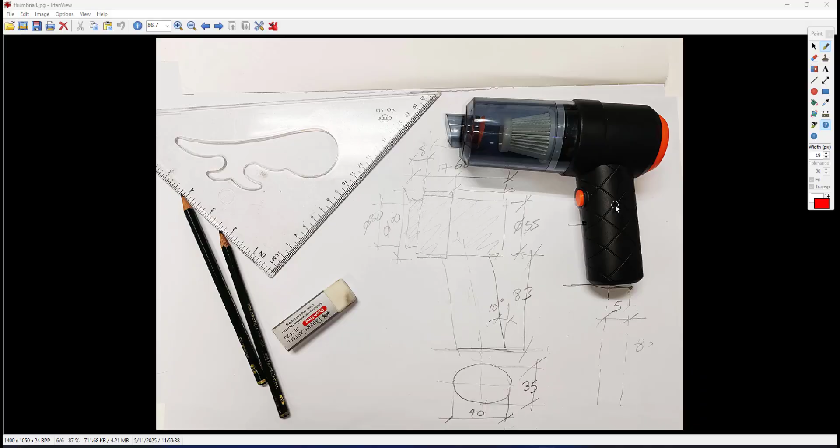This video will be part 1 of my SolidWorks project. For this semester, I asked my students to do this product, which is a mini USB charge vacuum cleaner. So this is mine. I already bought it from Shopee. So my students are here. I can share you here in Padlet. I have 30 students, so this is their choice. So we have various kinds of design here.

So for example, this one is more like this kind of shape. This is more cylindrical. This one has a handle that is more like an organic shape, and the rest is kind of like a gun shape, cylindrical shape. We have various kinds of design. So I did ask ChatGPT, if my students have various kinds of design, what version of mini vacuum cleaner should I do for my video tutorials. So ChatGPT asked me to do this one, the gun shape.

I hope, inshallah, I will try to complete before the end of the semester. So a complete set of how I do part modeling up until assembly, and maybe up until a set of working drawings of this gun shape mini vacuum cleaner.

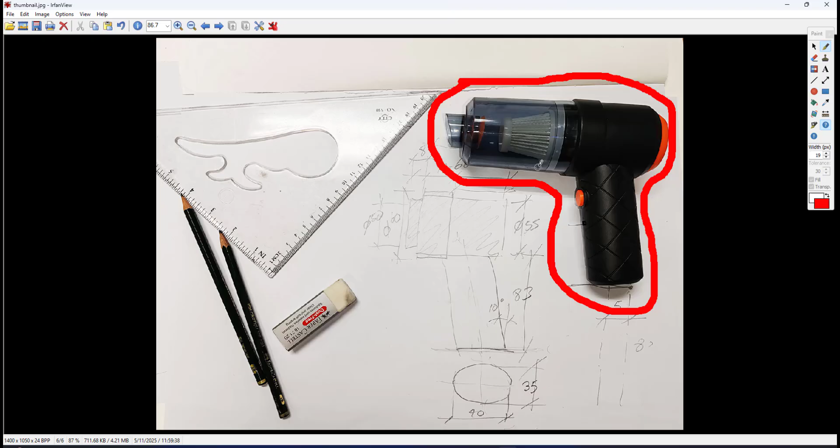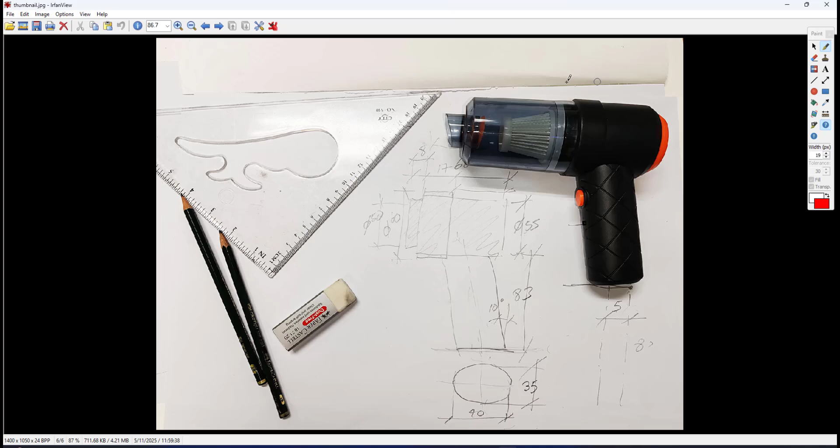For example, like the portable mist spray fan, I made a master model of the whole thing, then I would do splitting to front casing and rear casing, also splitting at the bottom for the water container, and then it becomes separate parts. But for this product, I don't think I will do the similar approach. I can make this as a separate part model. For example, the black color, we have a handle unit together with this chamber here. So I will do a part model of this black casing here.

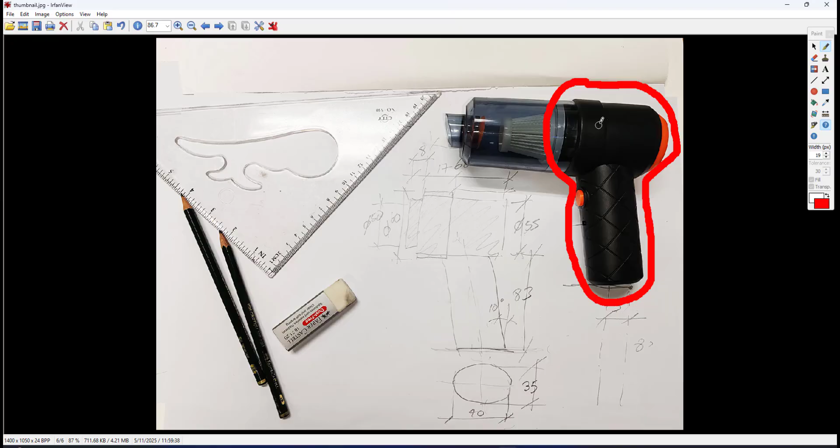Later in part 2, I will show you how I will do modeling of the other parts, like for example this vacuum chamber here, a cylindrical shape, where inside we have other components, an air filter, a valve, and so on. Alright, so for this kind of product, I will not do master modeling of the main body for the whole thing. I will do only this part, this black body here, the main body at the rear. If you look at this photo, I already dismantled the product, so the handle unit and this chamber here, and we have internal structure inside.

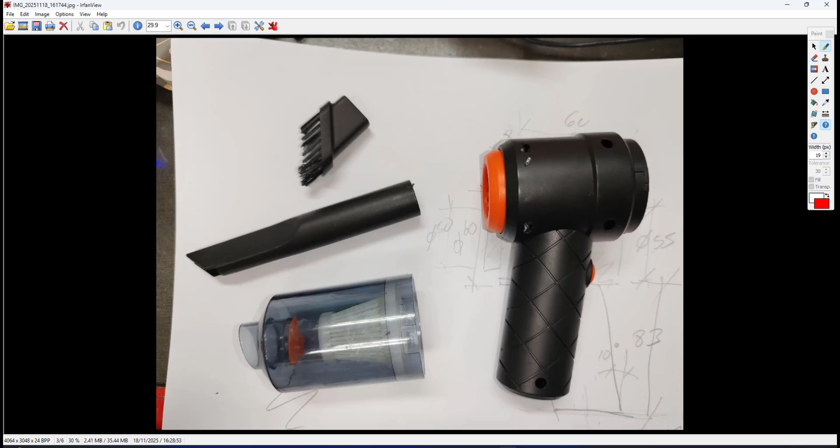When we do part modeling, forget about all the complicated structure inside. First we make the overall shape of the body of this handle unit, as shown here. So this is the handle unit. Actually this is turned to the other side. Let me flip. So it is like this. This one will be attached at this end here, and the nozzle will be attached to the other side. The long nozzle and the nozzle with a brush head are accessories. The main thing is the main body here, the handle unit. In this video I would like to show you how I will do this in SolidWorks.

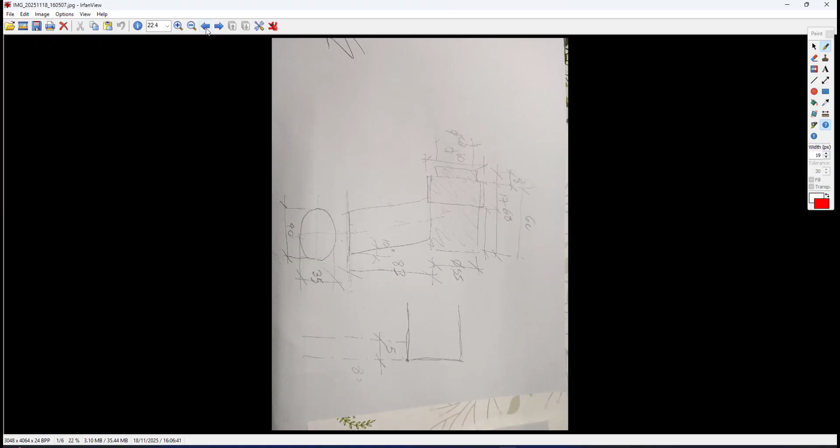An important thing in SolidWorks: when you do part modeling, you don't straight away do it in SolidWorks. You must begin on paper. So I've already done the sketch. If you look here, hold on. So this is the sketch. You must begin on paper, doing the sketching with rough dimensions. So this one is the dimension for the handle unit, the black color. So I already have the dimensions here. So make sure that you have this kind of sketch of the main body of your vacuum cleaner with rough dimensions, and then only can you start in SolidWorks.

Okay, let's get started in SolidWorks. So in SolidWorks, I will start part modeling and make sure that it's in millimeters. If you look in this photo, the orientation of this black color is a standing up position, so I will do it in the necessary plane in SolidWorks. Since it's a standing up position and it's basically a cylindrical shape, I will do it on the right plane. I will create a circle.

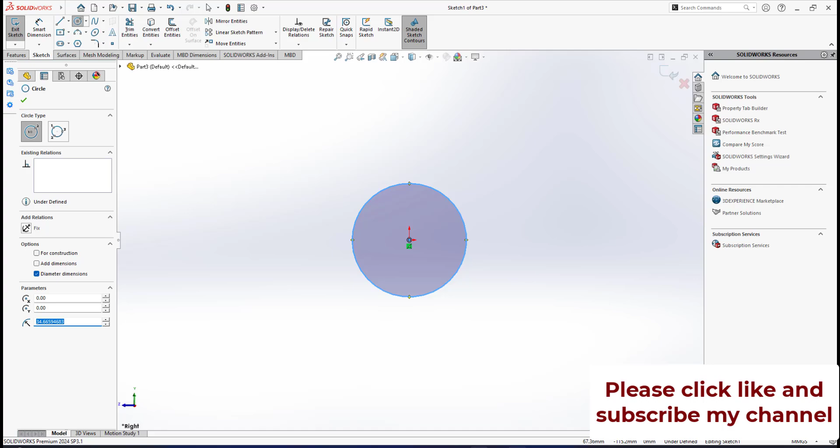So for the circle, if you look on the sketch that I've done here, I will start from the diameter 55 and the length is about 60. Then at the left end here, we have a smaller diameter of 50, and also here by distance 17, we have a bigger diameter 60. So I will start here. The base of the cylinder is 55, so the dimension is 55 units for the cylinder.

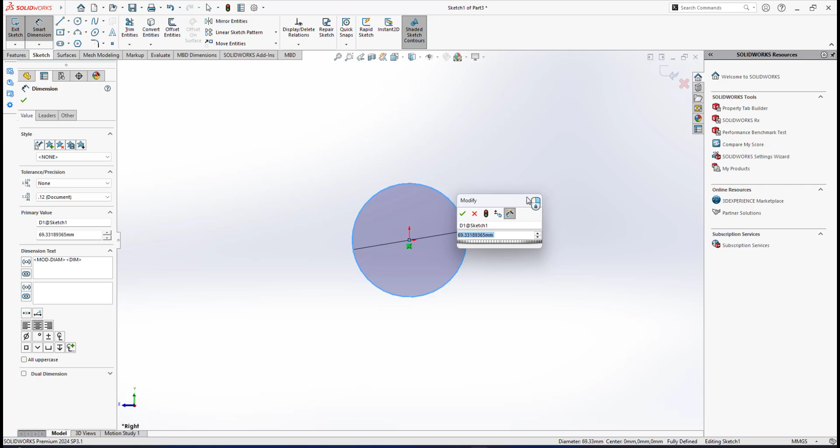So I will extrude it, but it goes to this direction. By default it is blind. I will go to this direction, and the distance is 60. So this is the main shape, the base cylinder here. Okay, I have the base cylinder 55 by 60, but I have a bigger diameter of 60 by a distance of 17 to the left, right?

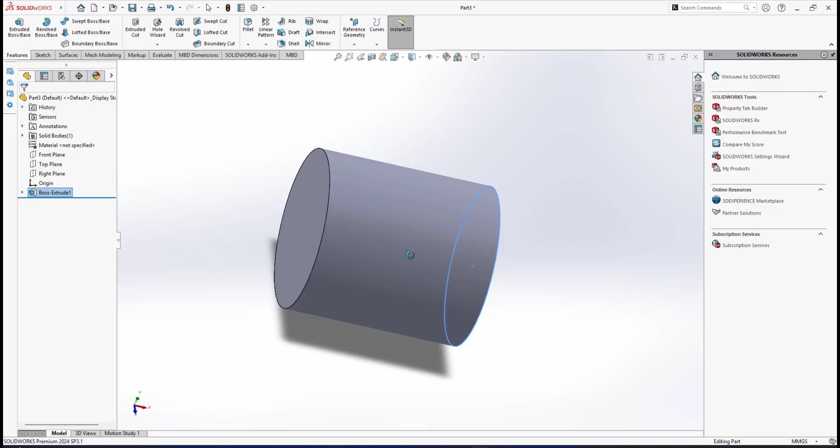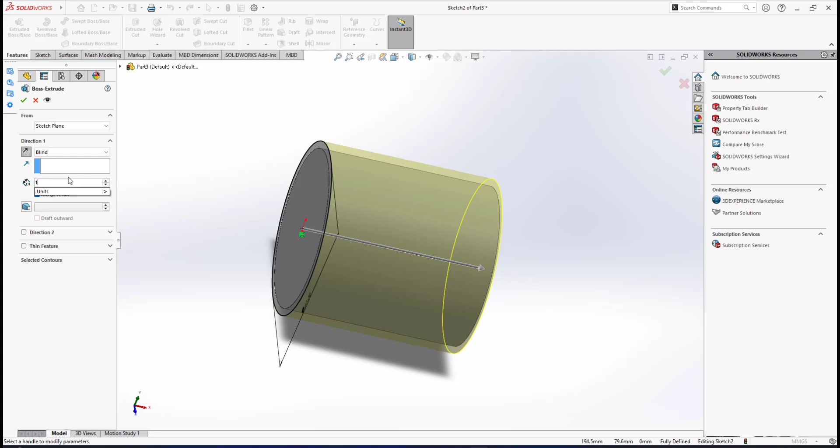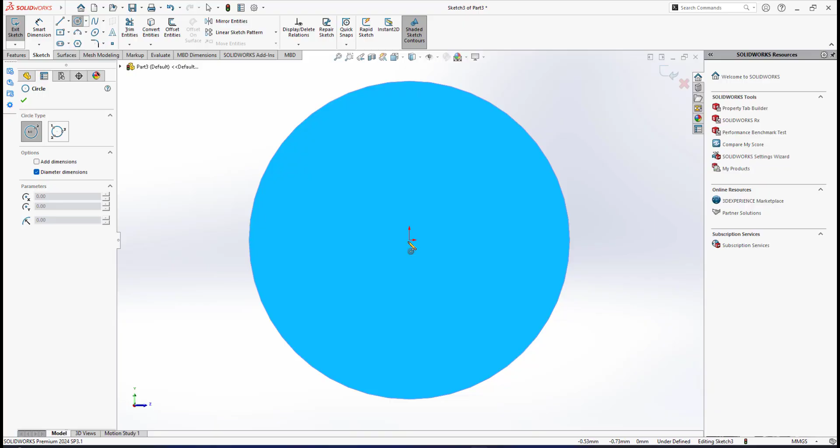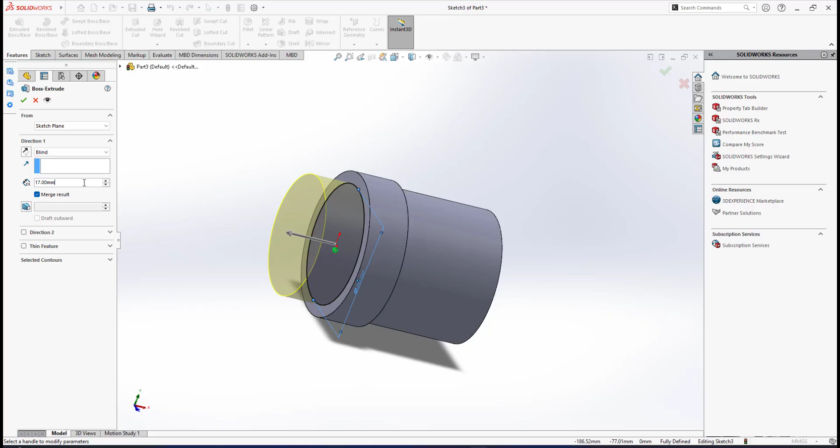So here at the left end, I will create a circle of diameter 60, and I will extrude to the right, this direction, by a distance of 17. So this will be the other feature of this main body. All right, at the end here, I have a small cylinder of 50, distance of 8. Circle at the center with diameter of 50. Hold on. The distance is 8. Okay, now I have the main body here.

Right, so this is the main body, and the next thing is that I need to create the handle. For the handle, we have an axis that is 10 degrees from vertical, and the distance from here is 83, and also here to here is 5 units from the end. It means we have a gap here of 5. So I need to create the center line by distance of 83.

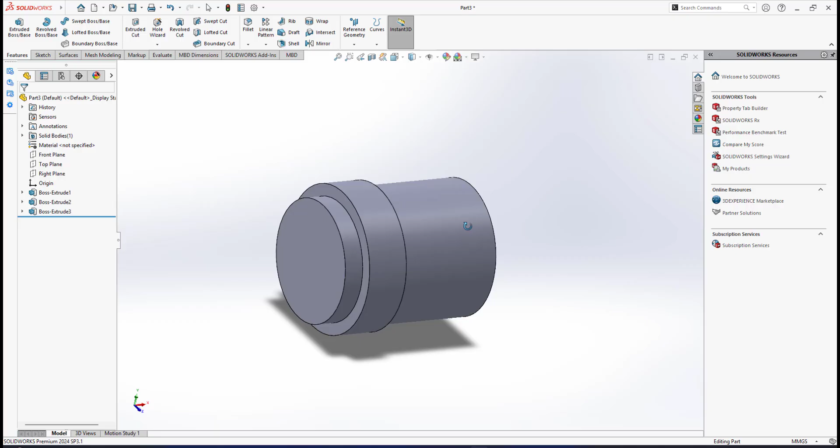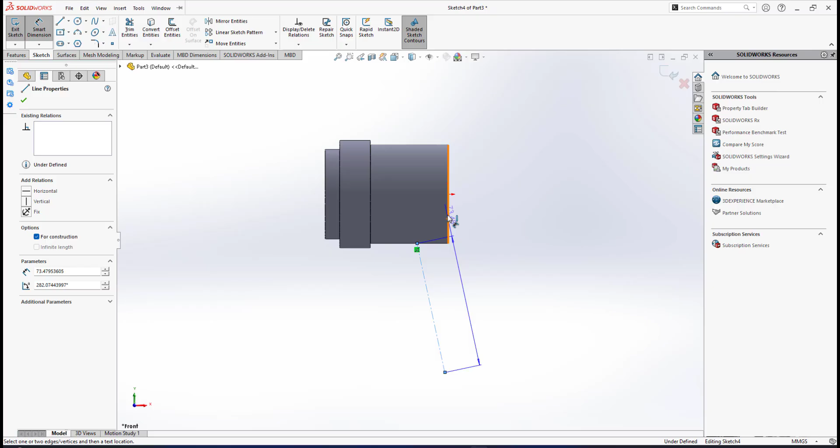So here in SolidWorks, I will go on the front plane, since the front plane is in the middle. I will create a center line, snap at this point, it goes like this, right? And if you look at the sketch, the dimension is 10 degrees to the vertical. So from here to the vertical edge is 10 degrees, 10 degrees from the vertical axis.

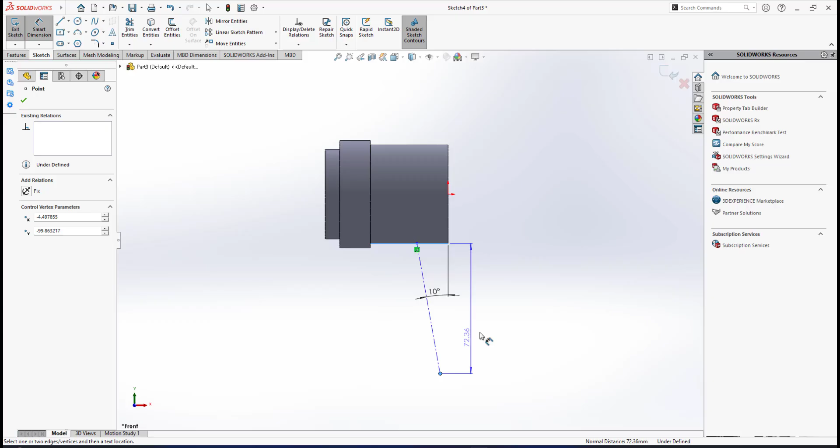But also in the sketch here, we have 83, from here to the bottom is 83. So it means the dimension from this edge to this point. Hold on, I go for dimension from here to here is 83. Alright, it's still blue color. I need to make the center line fully defined.

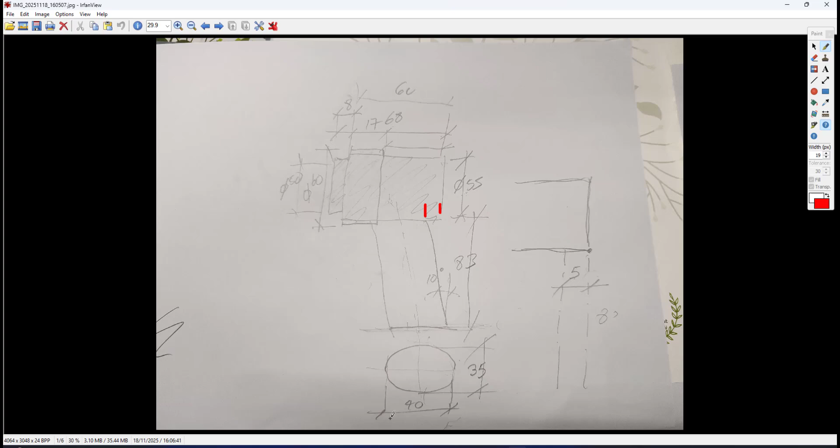Another thing to mention is that the cross section of the handle is not round, it's not a circle, it's an ellipse 40 by 35. Since the width of the ellipse is 40, half of it is 20, plus we have another 5 here, so from here to here is 25. So I will go for dimension from here to the edge is 25. Okay, now I have fully defined the center line. I exit the sketch.

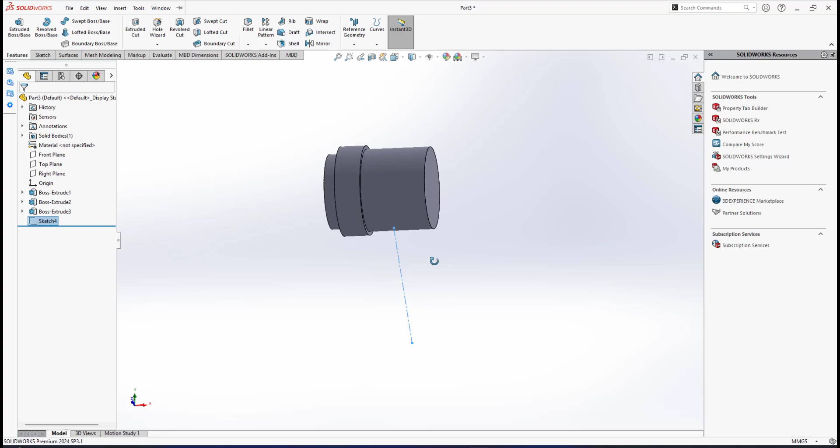Alright, since the cross section of the handle is an ellipse, here I will create a plane. First reference is here, second is there. On this plane, I will create a sketch. Okay, I can go like this.

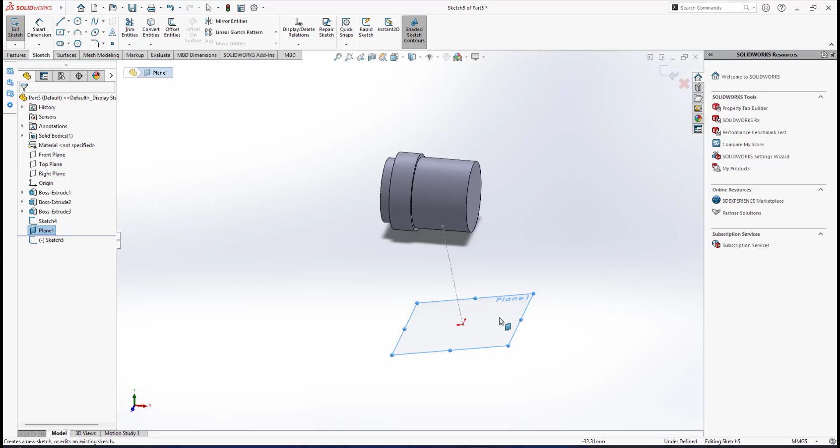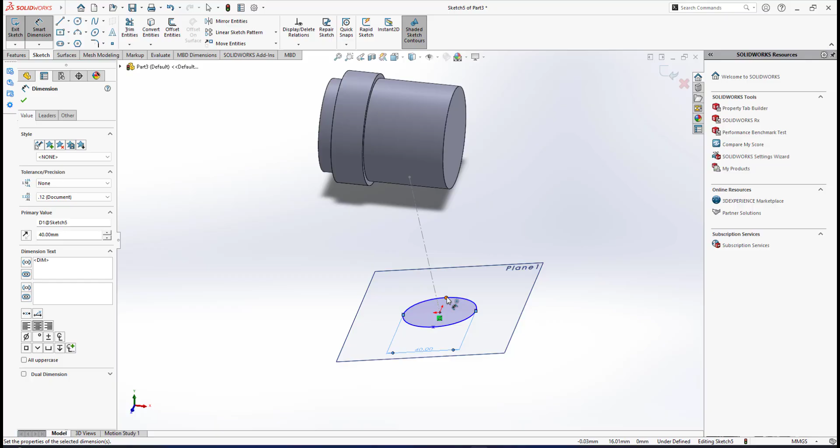Okay, here I will create an ellipse at this center point. It goes like this and like that, and the dimension here from this point to this point is 40, and the width is 35, right? The width from here to here is 35 units. As you can see, the shape is still blue color, it's underdefined.

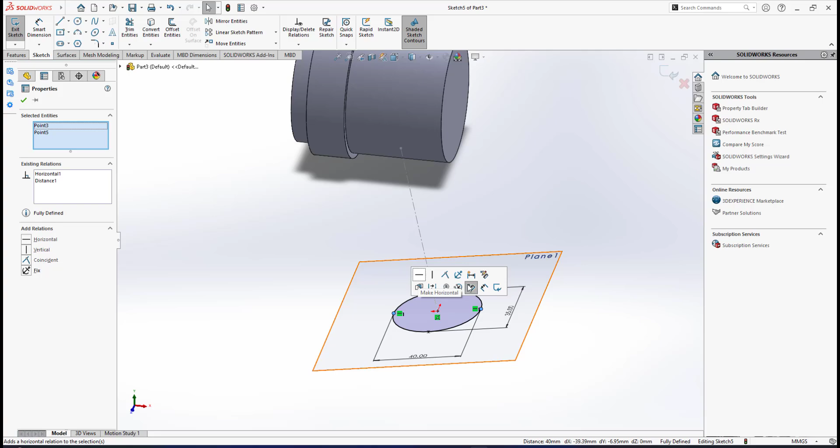I have to click at this point, hold my control key, click this point and make it horizontal. Now I have a fully defined sketch, and now I will do features, extrude. The direction is not downward, it goes upward, right? And I'm not using blind, I go to up to body, so it will end up at this body. Okay, then I go like that.

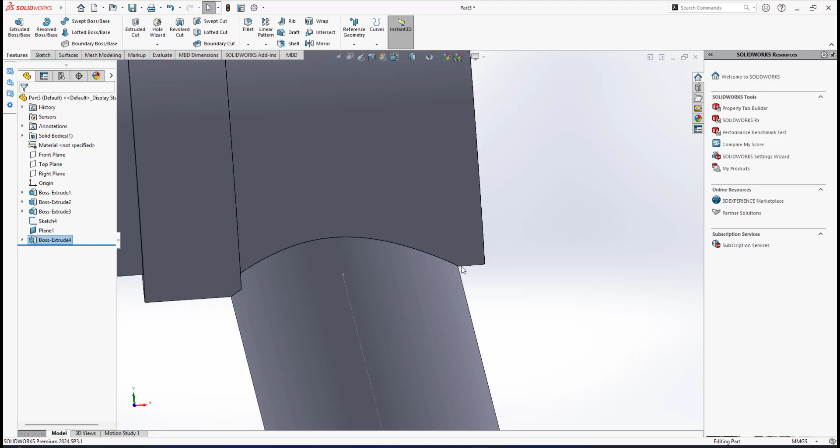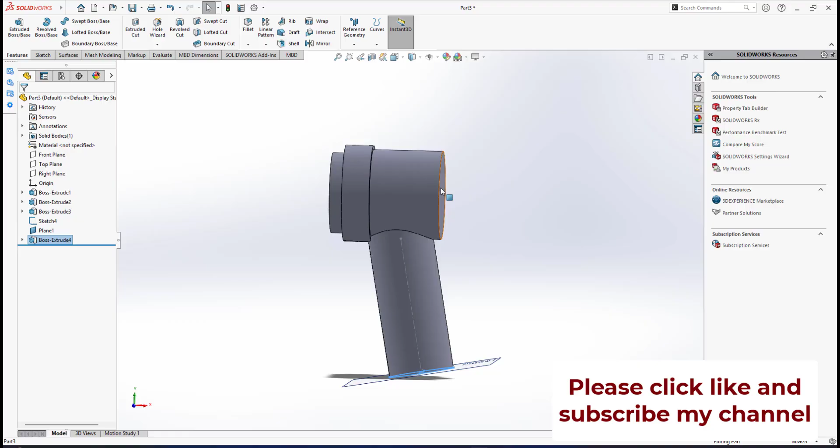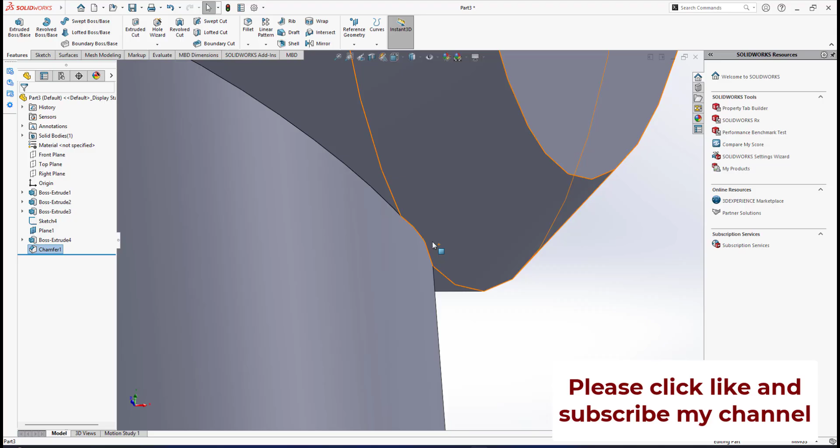Kind of similar. Okay, another thing is that if you look in the photo here, we have a chamfer. I already measured the chamfer distance is 5 units, right? So I will do here a chamfer of 5, and I select these edges, so I have a chamfer of 5 units, right? Okay, we have kind of excess here, so I can adjust a little bit. For this center line, it's not supposed to be 25. I put 26 to increase the distance.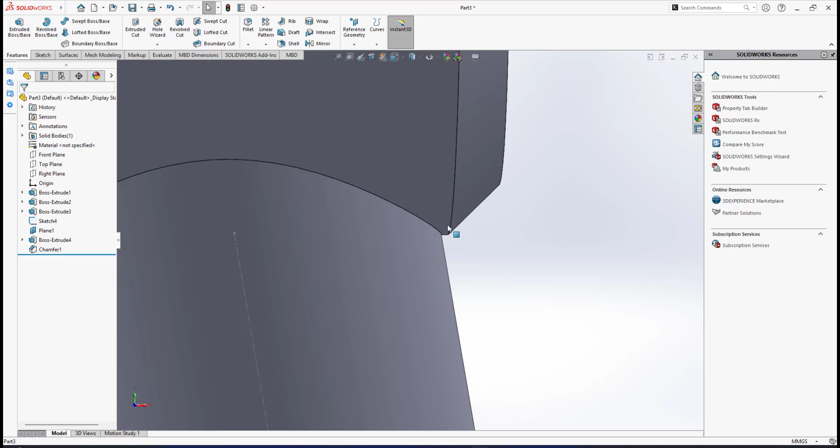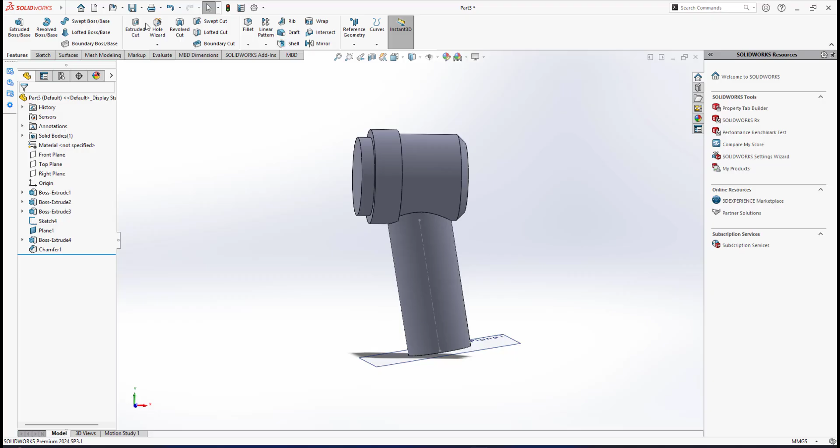Now I need to mix a little bit more. It goes like 5 millimeters from here. I adjust the distance of this one to be maybe about 28 units. Then, alright, I think this is good enough, so I will save this one as main body. I will replace the original file, so I have this main body of this vacuum cleaner as shown. This one is turned to the other side. The orientation that I show in SolidWorks is this orientation, right? It goes like this.

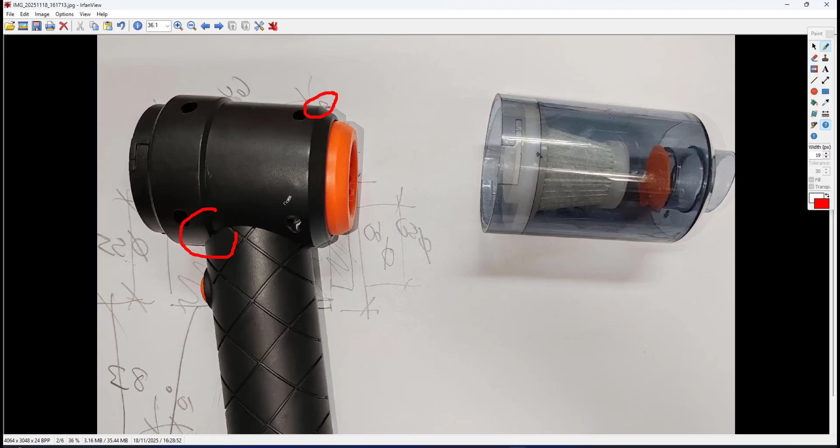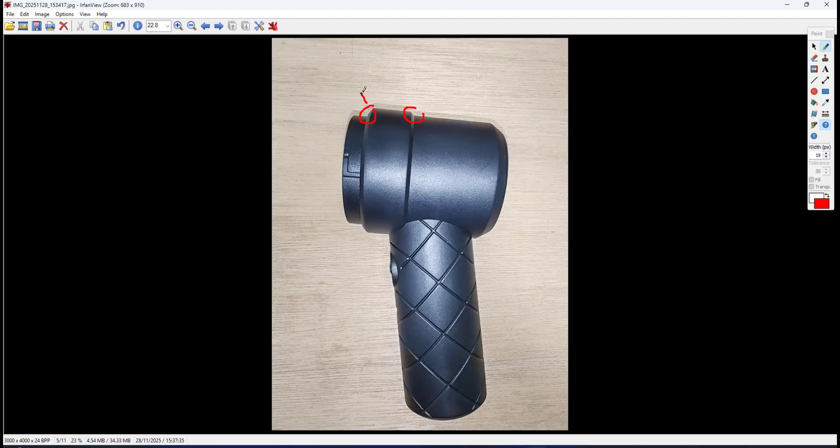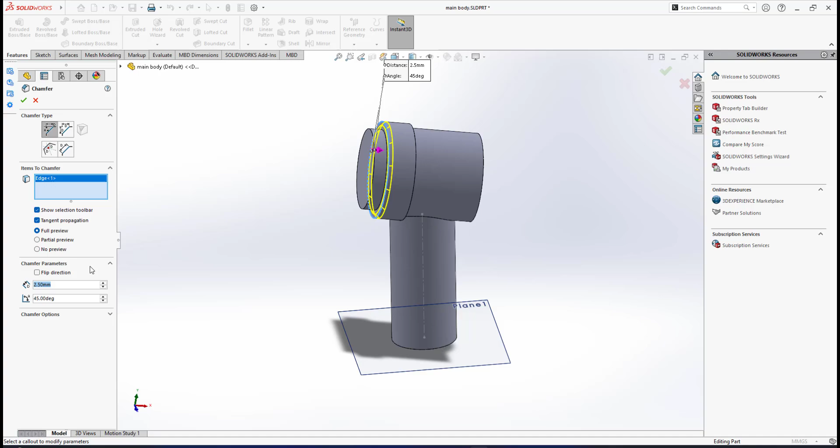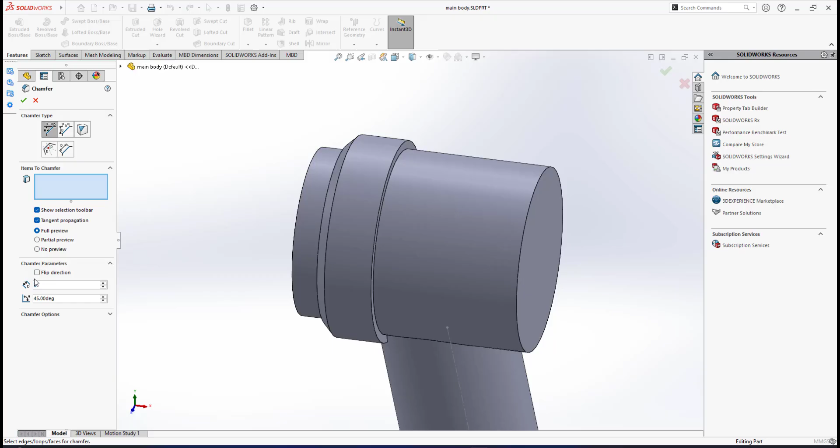Okay, the next move is that if you look at this photo, we have a chamfer here. For this chamfer, I will go for a value of 4 or maybe 3. This one will be 3, and at the edge here, since this one is 60 and at the back is 55, the chamfer is 2.5, right? So here in SolidWorks, I will go for chamfer. For this edge I put 3, and for this one, since the diameter is 55 and the bigger diameter is 60, we have a balance of 2.5 for the chamfer. So the value is 2.5, and I select this edge. Okay, I save my file again.

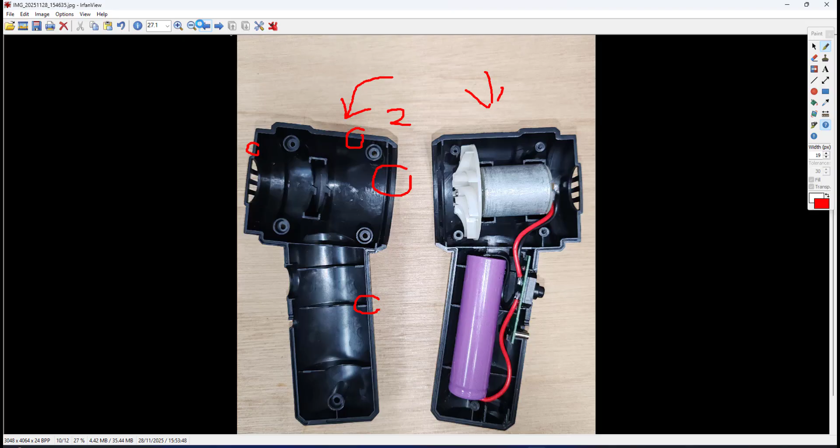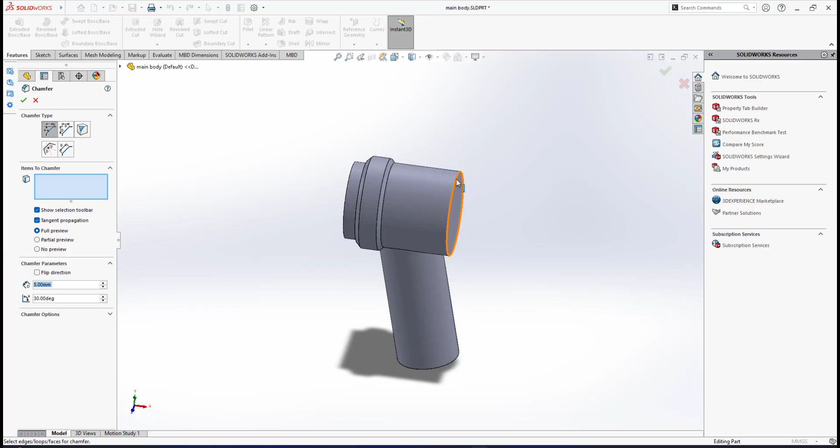Alright, the next thing is, if you look at this photo at the end here, if I zoom in, I discover that this chamfer is not 45. We also have a chamfer at the end here. It's not 45; the chamfer is more like 30 degrees, and the distance of the chamfer is 5. So at the end here I will do chamfer. I select this edge, the distance is 5 and the angle of the chamfer is 30 degrees. Right, so I have this chamfer at the back here.

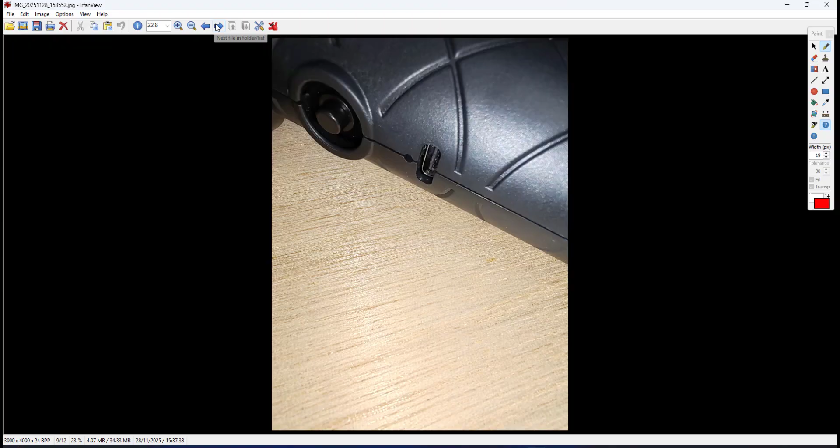Right, if you look at this photo again, I already dismantled this main body into this front casing, and this one is the rear casing. I already dismantled these two parts, and as you can see, the rear casing is at this orientation, and the front casing is at the other orientation. Right, so here, if you zoom in,

I need to split this main body into two parts to make the front and rear casings, and later I will show you. Here I will do shell. The thickness of the shell is 2 mm, but here the shell is even thinner. This is not 2 mm. Later I will show you how I will do this thin wall, but this one we don't have a wall.

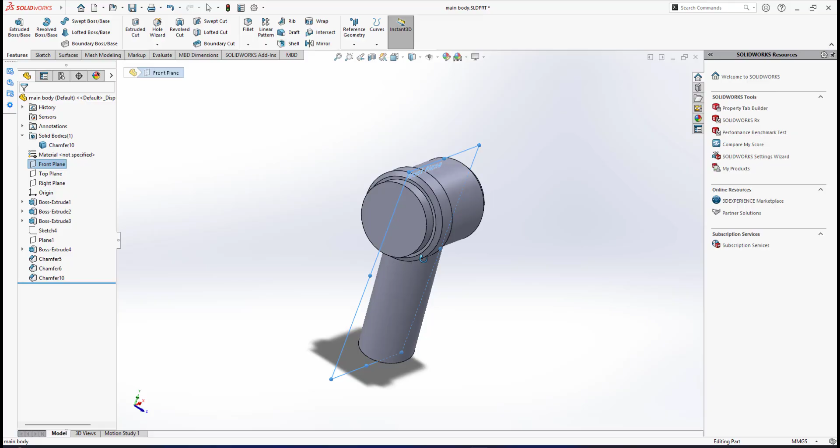It's a cut through holes. Okay, the first thing is that I need to split this main body into front and rear casing. Since my front plane is laying in the middle here, the front plane is already selected, so I will go for split. Front plane is already selected, cut part, then I select both, make sure the consume cut bodies is unchecked. See, already split.

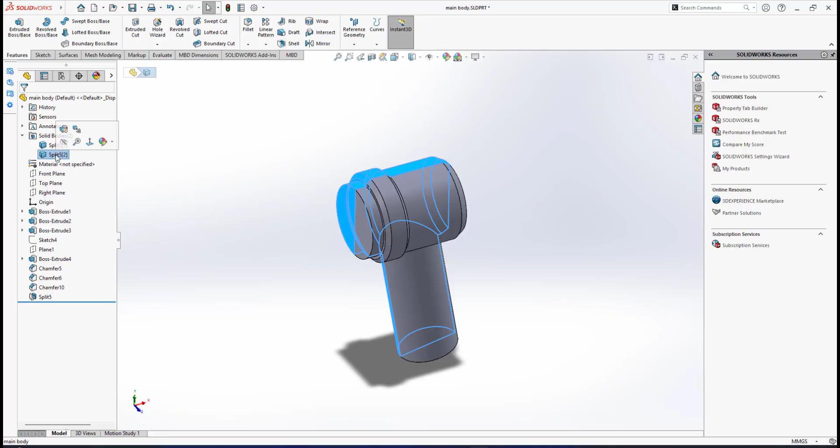As you can see, we have two solid bodies now. This one is the front and this one is the rear casing. I select the rear casing. This rear casing is still solid, so I need to make a shell with a thickness of 2. So shell, I put a value of 2, and I select this face, then I click OK. Now I have this thing.

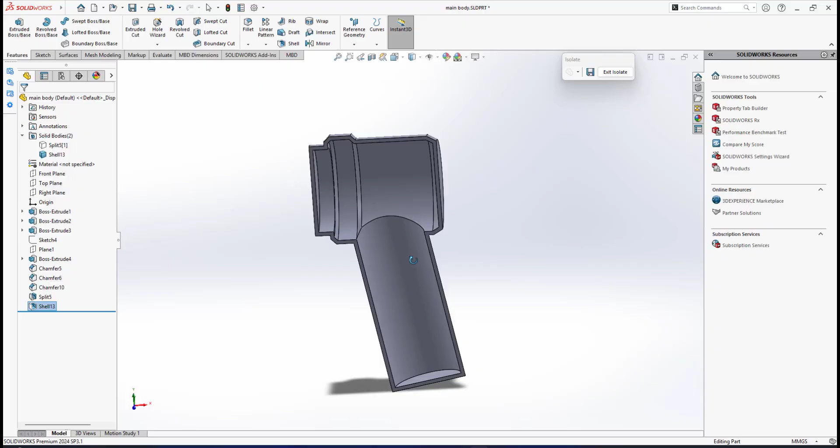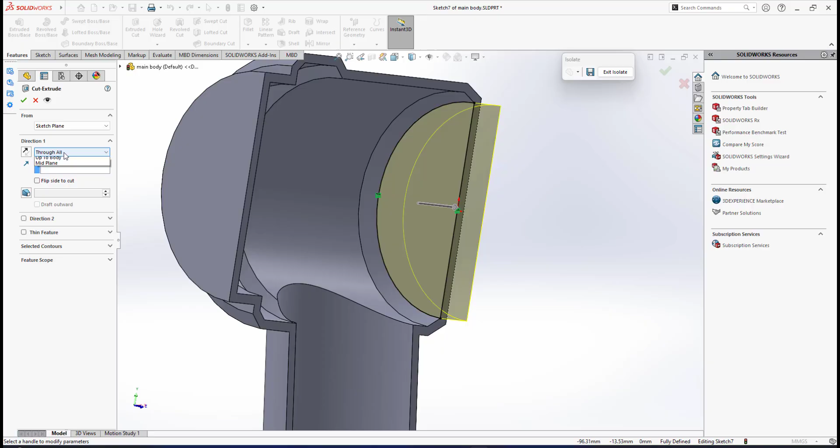As I mentioned to you just now, here is even thinner, and this one is a cut through holes. So at this face, I will create a sketch. I don't need to create a circle of that circular edge there. Under sketch we have convert entities, so I click convert entities. It traces the outline. So this one I will do features, extruded cut. I will go for through all, and I have a cut through holes there.

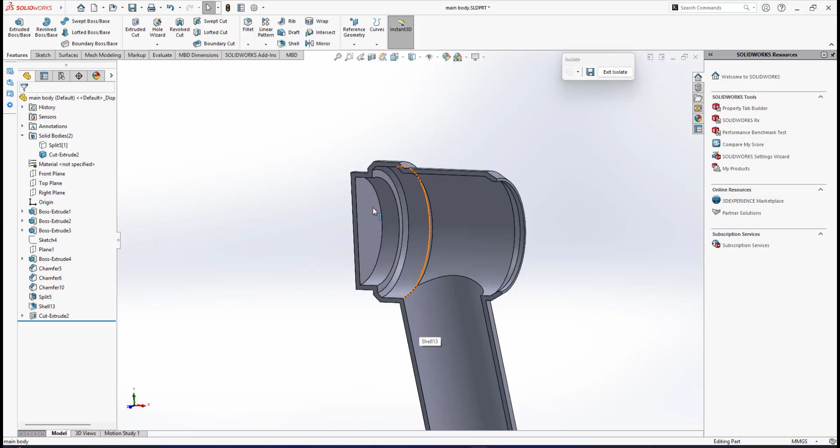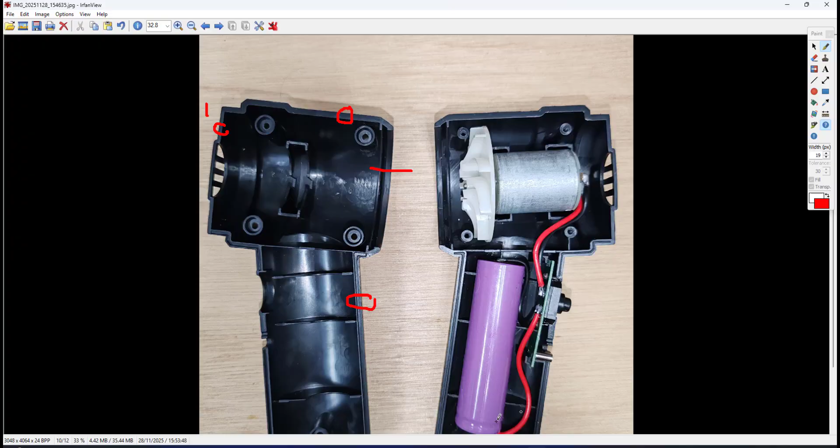Alright, about this wall. The rest of the wall is 2 mm, including the handle, but this wall is even thinner, as shown in this photo. Okay, the wall here is about 1 mm. Since I already made a thickness of 2 mm here, I will create a sketch here, and I will use convert entities, so it traces the outline.

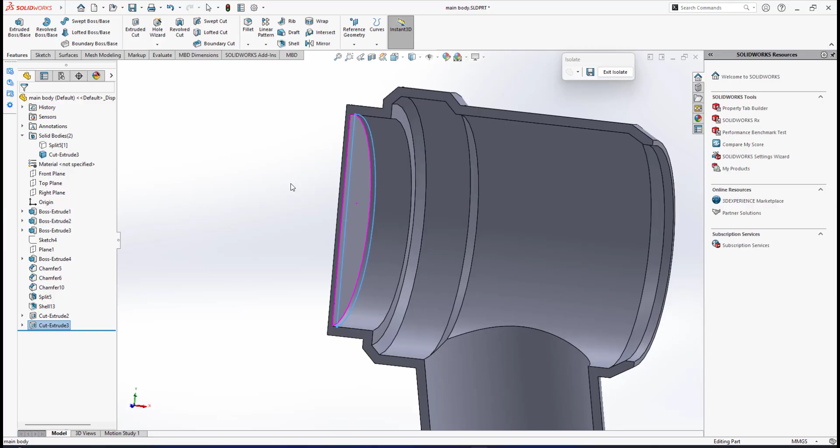So this one I will do features, extruded cut, but not through all. I will go for blind, and it goes for 1 mm. So it means that we have a balance of 1 mm there. So this one is a thinner wall. Let me save my file again.

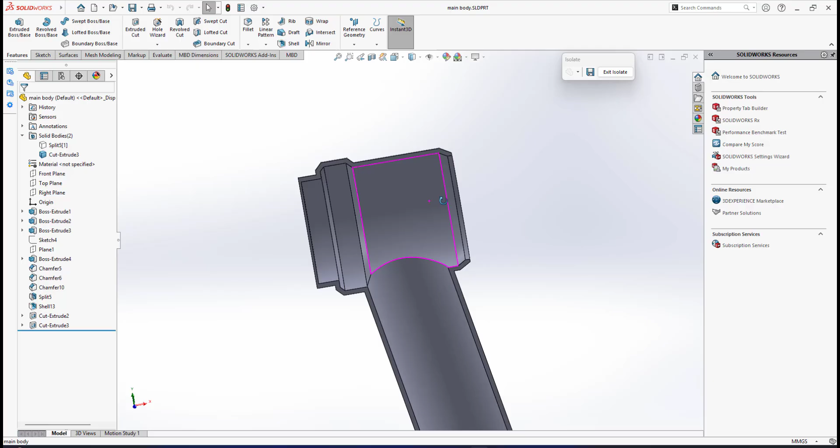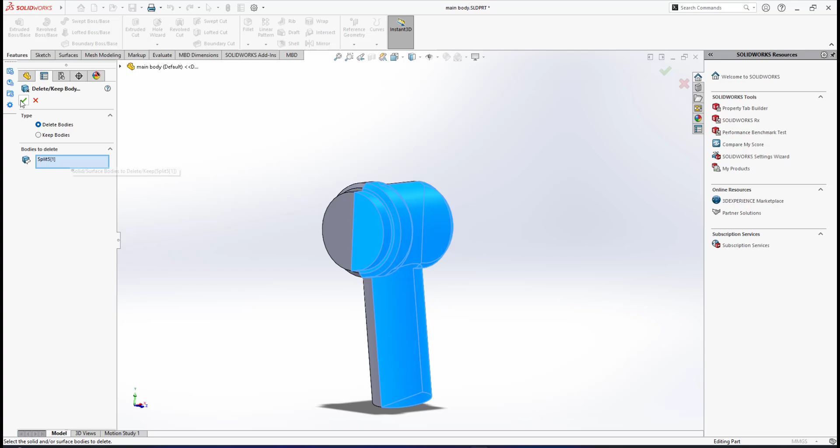What about the other side? I don't have to repeat the same procedure. Since I already split it, at the rear casing I already made the shell, with this 1 mm thickness and 2 mm thickness, and also cut through holes. So the front casing, I just simply delete it. Since I have two bodies, I select the front casing. Under insert, features, we have delete body, so I can delete. And I only have the rear casing.

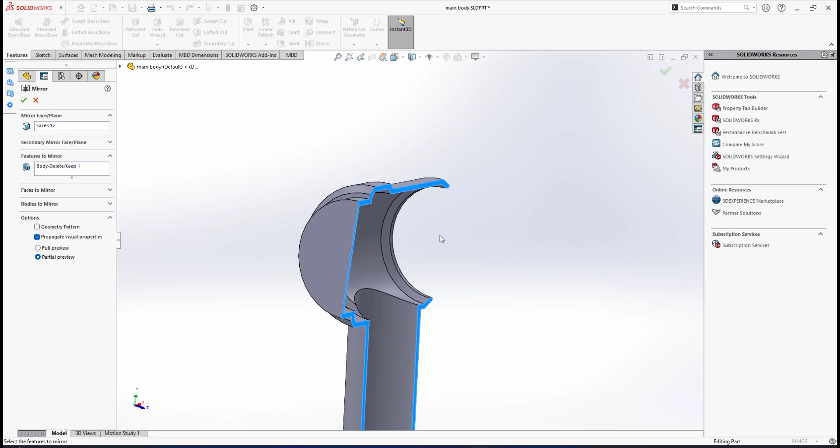This rear casing I can mirror to make the front casing. So here I have mirror. My mirror plane will be this flat plane here. Here I will not use features to mirror; because this is the whole body, I will go for bodies to mirror, then I select this one. And to separate the rear and front casing, I will uncheck merge solids, so it will make a separate body.

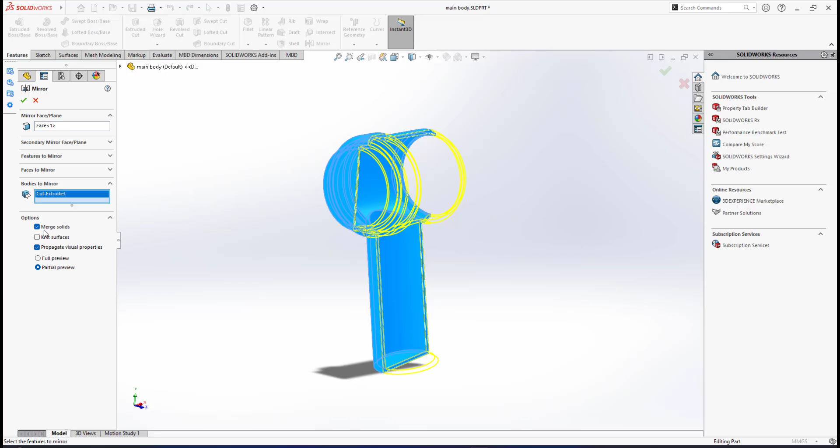So now I have two parts. Here is the rear casing, the mirrored one is the front casing. As you can see, the front casing has the same features as the rear casing. Alright. Let me save my file again.

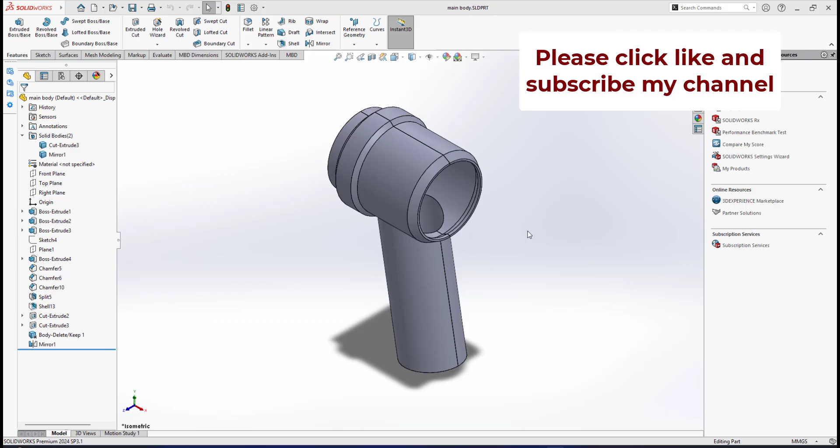I think I end this video up until this position. Later, in part 2, I will show the continuation where I will do detailing of this rear casing and also the front casing, where we have a structure here. But in my case, I will make a simpler version, even with better features compared with this original product. Inshallah, I will see you in the next video.